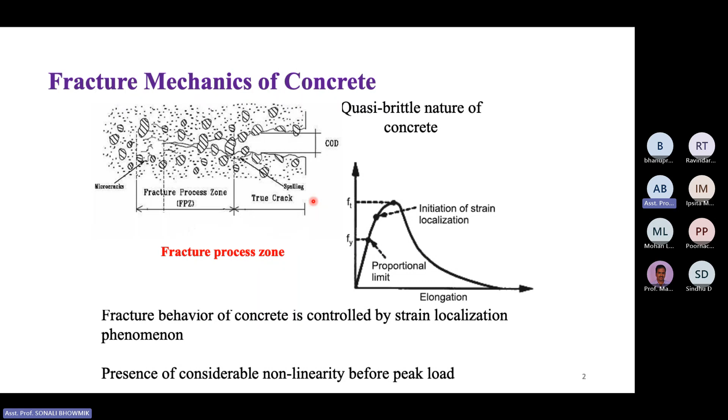Before peak load, these things are happening due to the non-linearity before the peak load. Now, what is exactly the non-linear fracture mechanics? It is nothing but these models.

In that image, you can see there is a crack initiation and an opening, wt, wc. This theory depicts how much stress is generating, what is the severity of stress ahead of the crack tip, which we actually call the stress intensity factor. These stress intensity factors define the severity of the crack ahead of the crack tip.

I'm not going deep into this analytical thing here, but the fracture energy I want to talk about is nothing but the energy required to propagate a crack, or you can say, to create a new surface.

This energy is something very important to compute or understand, to know the fracture behavior of a material like concrete. In this kind of model, the fracture energy is a very vital parameter through which we can understand the rate of crack propagation, the behavior of crack propagation, or the pattern of crack. Based on this, there are many models developed that I'll subsequently discuss.

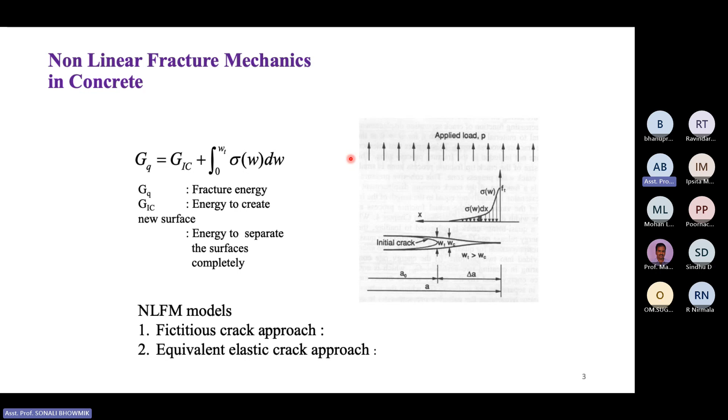...complicated when we are talking about fatigue of concrete. Fatigue means you have a structure which is subjected to a repetitive type of loading for a longer period of time. So what is happening in fatigue?

Suppose you have a structure with a service life of 50-60 years; this load is applied with a small amplitude, but applied over a longer period of time in repetitive cycles. Now in fatigue, to extend the service life, fatigue life assessment in terms of applied load cycles is important.

Why is it important? We want to know what will be the fatigue life, the life of a structure. In case of other materials, well-defined theories and models are there which can directly tell you the fatigue life of a structure.

But in concrete, which is much less explored, people are working a lot in this area to predict the fatigue life of a structure by considering all important aspects and phenomena: loading patterns, and parameters related to loads, frequency, and amplitude, along with other factors like environmental factors and concrete properties. This is important to learn and understand what the fatigue life of a structure will be.

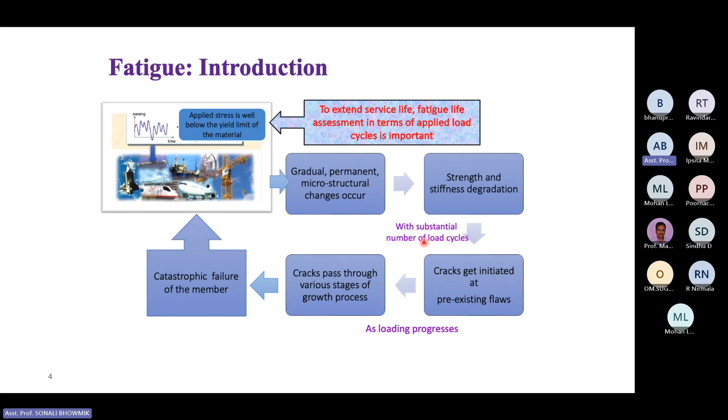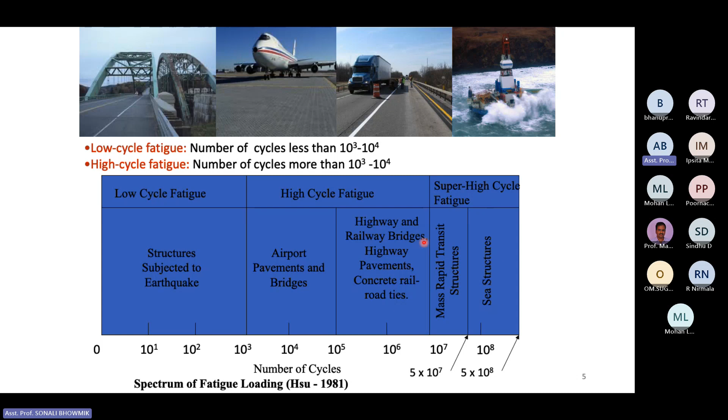So what exactly is fatigue loading? There are different types: low cycle fatigue and high cycle fatigue. Low cycle fatigue you can consider as structures subject to earthquake. With this timeline and these values, you can understand the number of cycles, the intensity, and the upper and lower bounds for high cycle, super high cycle, and low cycle fatigue loading. Basically we are dealing with most cases of high cycle fatigue loading, where the amplitude will be very low.

So how to handle those fatigue type of problems? As I mentioned, in the area of metallic structures like steel or other alloys, in the field of aerospace engineering, people are working in this area extensively, and the S-N curve is one approach through which one can find out the fatigue life, and this is well established.

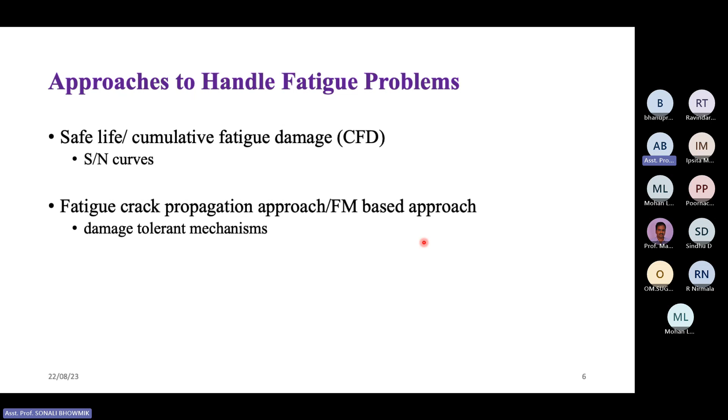But this S-N curve is not fully valid for structures like concrete. I'm not going deep into the S-N curves because here I'm specifically limited to concrete. So for concrete, there are other approaches, like the fatigue crack propagation approach, through which fracture mechanics based fatigue crack propagation approach one can predict the fatigue life.

So this S-N curve approach is not valid for concrete structures, because it does not fully include the concrete failure mechanism, and also does not differentiate between crack initiation and propagation phases. This is because concrete is a bit more complicated than alloy, due to the presence of a fracture process zone, as I have explained, which is non-linear in nature. So it cannot accurately address the problem. It involves extensive experimental data collection and does not involve fundamental material parameters that are valid here.

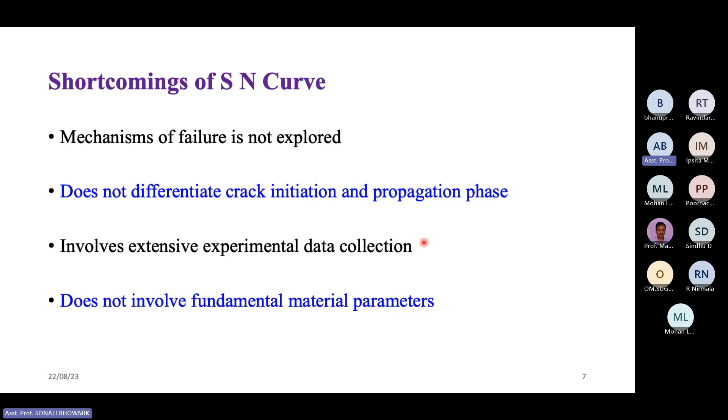So what does this fatigue crack propagation approach do? Here we assume that the structure has a pre-existing crack of some initial size. This approach is based on the assumption that there is a pre-existing flaw or crack of initial size, and crack propagation. When you assume this, you can find out the critical crack length and the number of cycles, all based on this assumption. And you can understand that failure is prevented even without giving excessive safety margins.

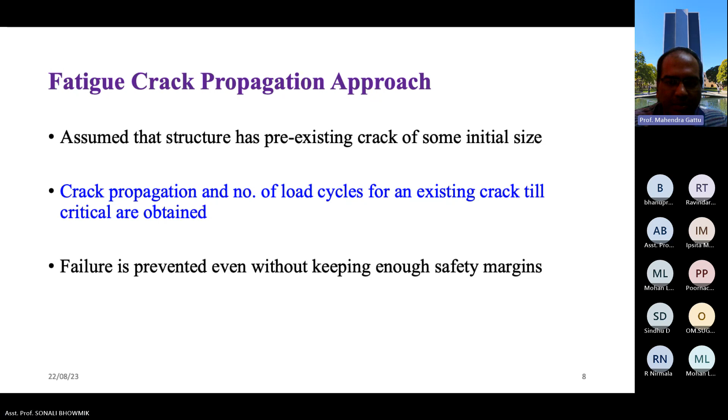Is the PPT visible on this side? Right side, sir, it is visible. We are just seeing the slide on fatigue crack propagation approach. For me, the right side is not visible, I don't know why, it's in the left location. You can press the escape button and then I can start. No, it's not an issue for me, I can carry on for others, just to make sure.

Actually, we lost the slides now. I mean the last slide, we lost it. I'm not able to see the slides, I don't know about other people. Can you see the slide? Sir, I'm also not able to see the slide. I couldn't see it either, probably. Let me reshare the presentation. Again, I'm sharing the presentation, I don't know what... it got hung.

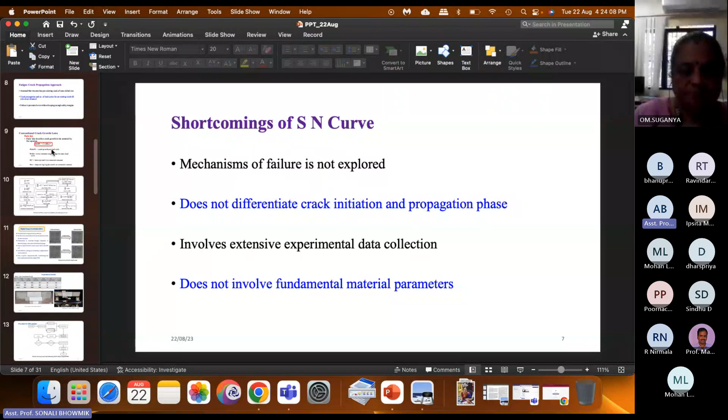Is it fine now, sir? Yeah, okay, okay.

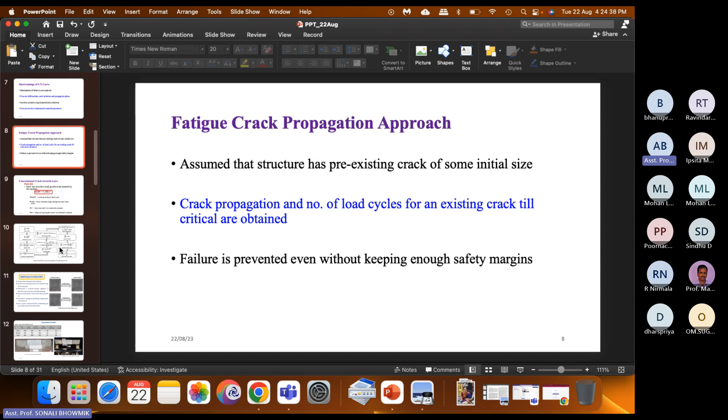So, on that note, to predict the fatigue crack growth of concrete, there are many analytical models developed till now, based on some pre-existing empirical formulae, and also many models that predict the fatigue crack propagation of concrete. Here I am just giving some overview.

Now here, what is the issue? There is a lot of research going on in this area. Why is this specific equation not valid for concrete? Because concrete deals with many more parameters, and finally researchers have come out with many parameters.

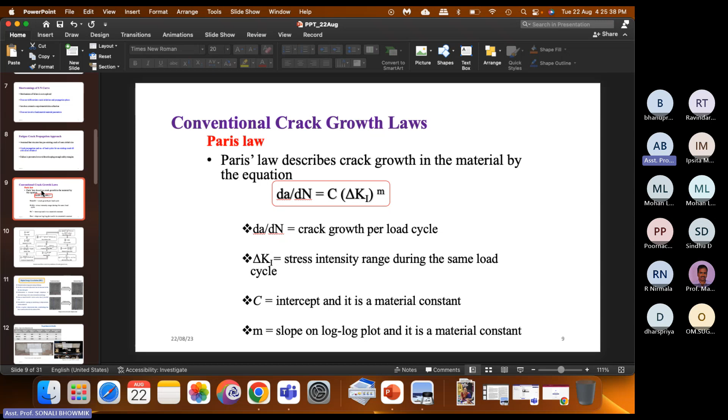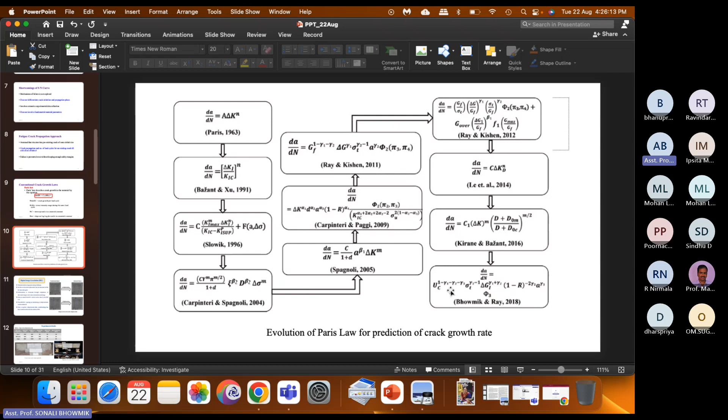Like in this PPT, you can see the evolution of Paris law prediction for crack growth rate in concrete. It started in 1963, and the latest one, derived in 2018, is a crack growth rate law derived for plain concrete. If you see, the last expression deals with many more parameters, like critical energy release rate, crack length, and other parameters like stress ratio.

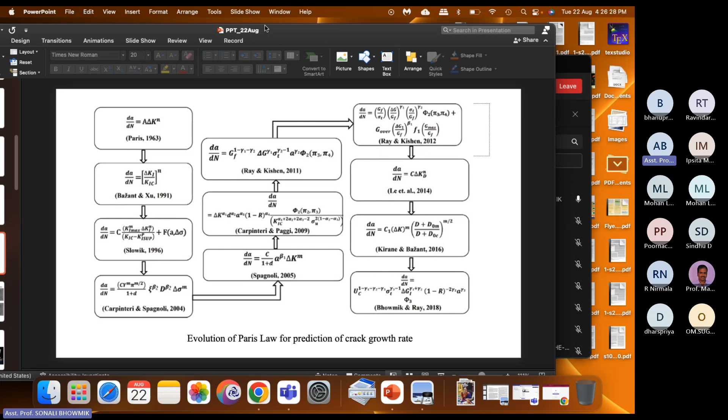You have other parameters like energy release rate, sigma t meaning tensile strength, and many more things. So these are some developments in this area, where there was an attempt to develop a fatigue crack propagation model which can accurately predict the fatigue crack growth rate, and finally the fatigue life of a structure.

So, in understanding these models, it has been understood that every model was refined and improved eventually, and finally arrived at a model which is much more improved and robust, giving a very good prediction of fatigue crack growth rate. So this is the latest model.

This analytical part is up to this much, where people have already done work. In this model, it has already been proved, and in this paper things are already explained in more detail, but here I'm just mentioning a few things: in the analytical area, predicting the fatigue crack propagation model depends on multiple parameters, and it is very important to verify and validate those parameters, and to understand whether each parameter has a direct or indirect effect on the fatigue crack propagation model.

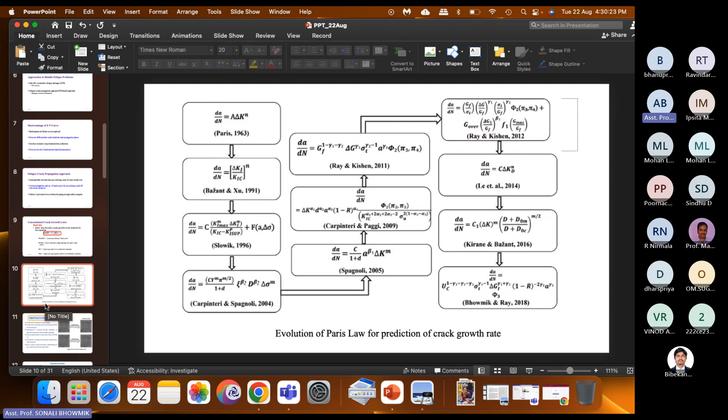But here, where I'm working in the area of advanced crack detection techniques, which is non-contact techniques, DIC and acoustic emission. Here I'm explaining a few things of DIC, where this is nothing but non-destructive.

This is an image processing technique where we compare images, we click images during the experimentation, and we compare both the images, meaning deformed image with undeformed image. By doing this, there are already softwares available, and also some open source algorithms available. Those algorithms one can use, refine, modify, and improve to find out the surface strain and surface displacement of materials.

So this is a very long process of digital image correlation technique, where it is not only dealing with the algorithm, we have to prepare the sample, and as I mentioned, in that approach what we do is we are always considering a pre-existing flaw or crack size, which we call in experiments the notch size.

For notch, those notched beams, by preparing those samples and clicking images at particular intervals of loads and time, we are getting those images, and the next step is rigorous analysis of all those images.

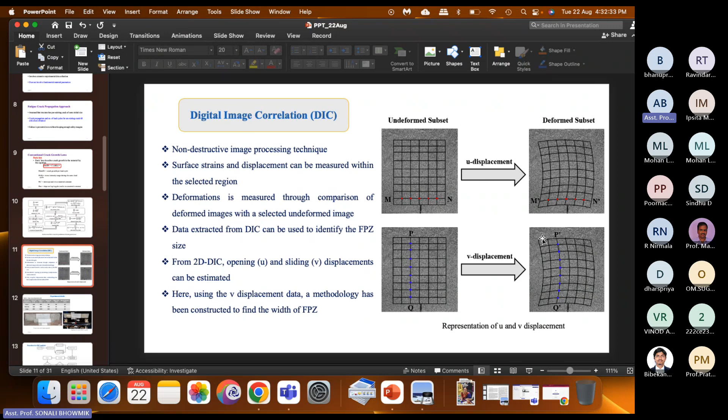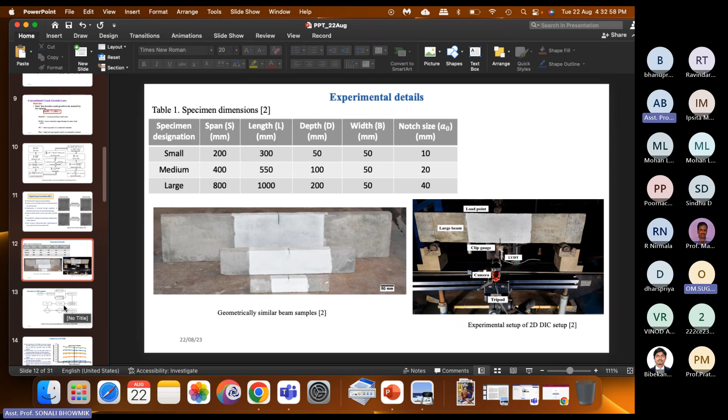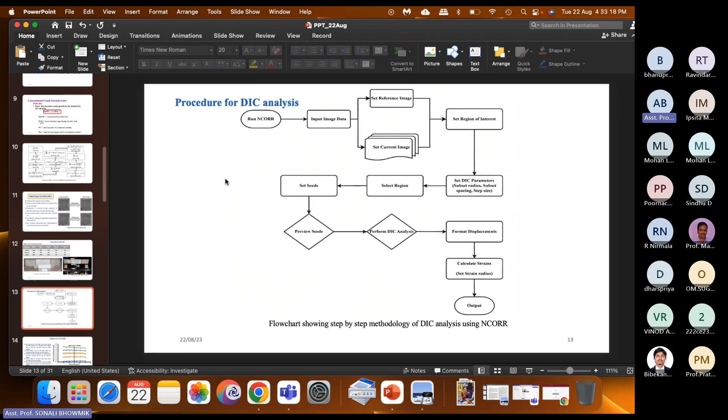This is the DIC procedure using the NCORR algorithm. This algorithm was already developed for other materials also. Now for concrete, by calibrating this algorithm, we can use it for plain concrete. Till now, this algorithm has been modified for plain concrete. We have planned to develop it for other purposes also.

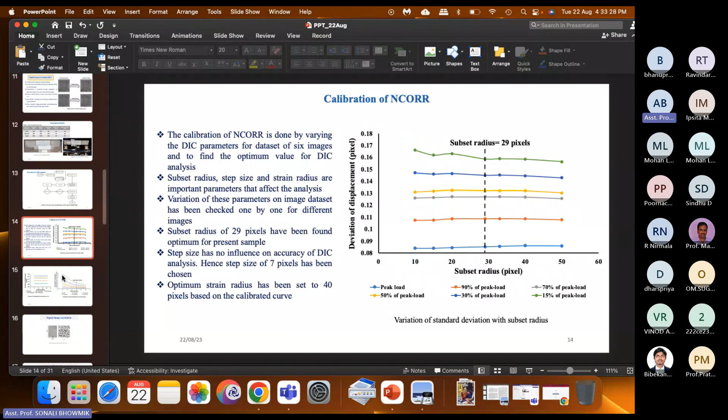Here are the calibration procedures of this algorithm, where those subsets and these are input parameters, because definitely we are dealing with concrete. We never know what is the accuracy of those results, since these are surface displacements, so we can't blindly rely on whatever the algorithm gives us. In that case, the input data has been verified repeatedly with different input parameters, and we found very good results with some optimum values.

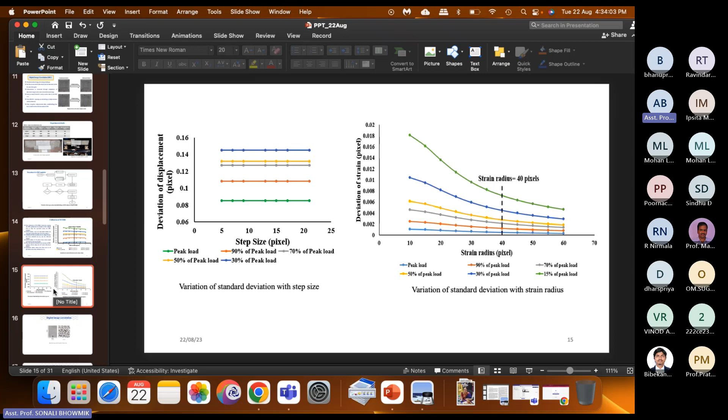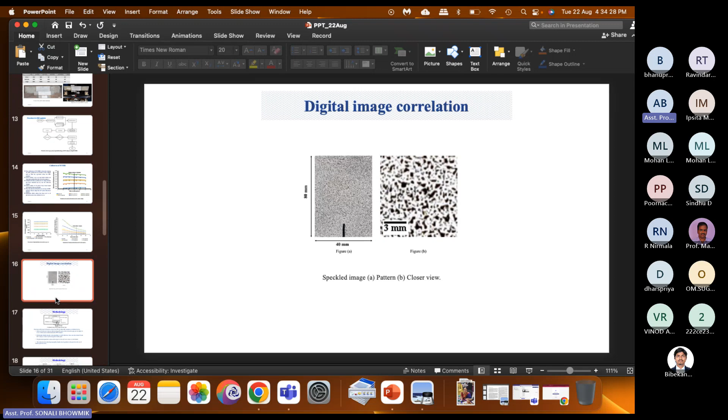Now, what is the use? Why is this data used? One is surface displacement and strain, we can get it, and for other purposes also we can use it. But in fracture analysis, we don't only want surface strain and displacement, we want to know the fracture patterns, the crack growth pattern.

So in that case, using those data, two methodologies have already been developed. One methodology is to find out the fracture process zone size in terms of length. Another methodology is to find out the fracture process zone size in terms of width. Both dimensions are very important for the fracture process zone, because as I mentioned, this fracture process zone is crucial and totally related to the fracture behavior of concrete.

This nonlinear zone, if someone predicts what is the area, meaning within the concrete what is the size of this fracture process zone, then one can understand how much energy the structure can absorb or dissipate accordingly based on the problem. So here a method has already been developed to find out the fracture process zone.

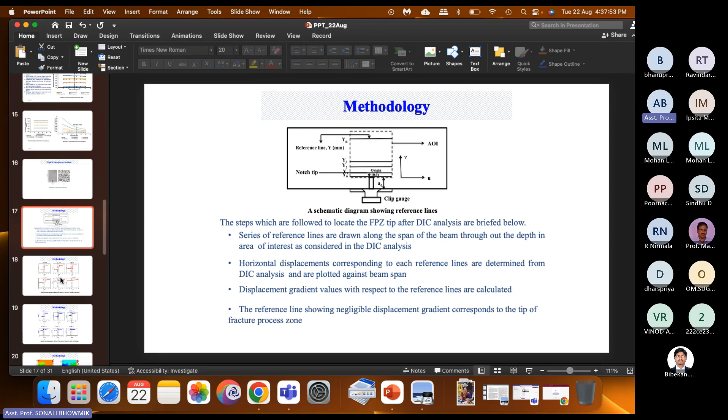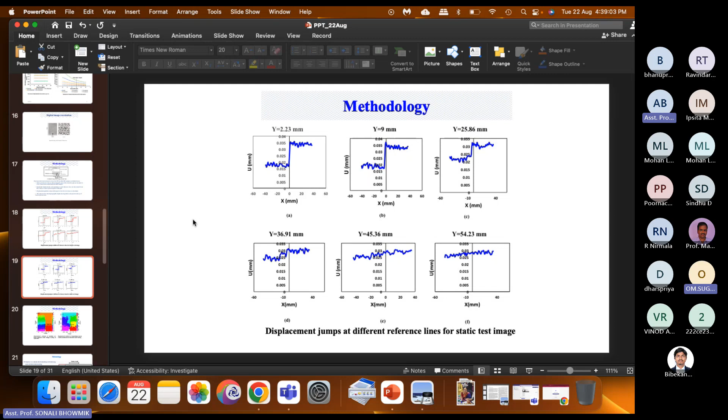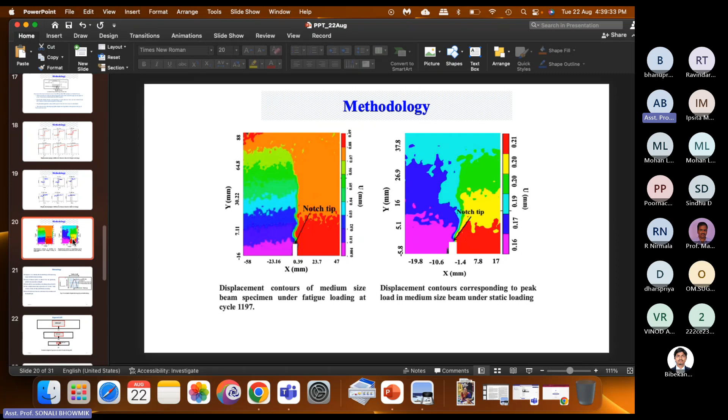Now this is about the fracture process zone length, and this work can be carried to fracture process zone width, where methodologies have also been developed and verified by the fracture process zone length, showing it is working fine. So why is it important to find the fracture process zone width?

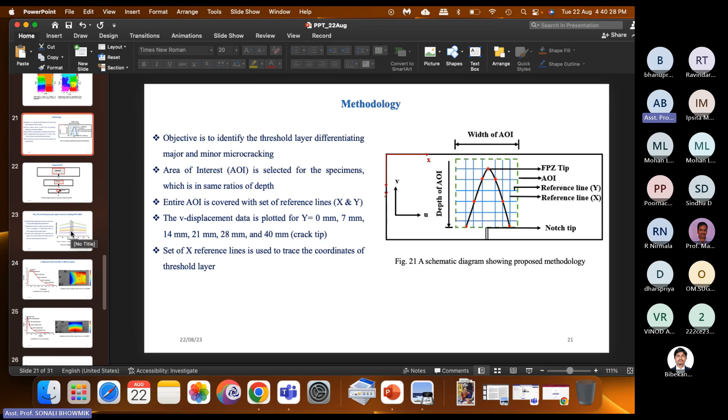Because it gives us an accurate estimation of fracture process zone size. Previously it was understood that there is no significance in finding the fracture process zone width, but eventually many other researchers found out that it has significant size and is very important to find. So in this scenario, a set of data was again analyzed, and these are some plots for DIC analysis.

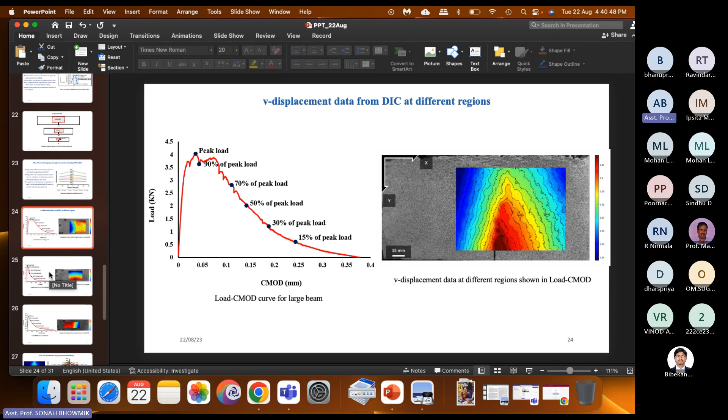If you can see here, this is displacement data extracted in the V direction. As I mentioned, deformation in the V direction is vertical. That's how it has been calculated, and finally we arrived at the conclusion that the size of the fracture process zone can be computed with the help of DIC analysis, and non-contact techniques like DIC and acoustic emission.

This acoustic emission area is also where I found the fracture process zone size and fracture patterns, which I have not included here, but it is an area that can be fully verified with both non-contact techniques. From this validation, it has been detected that the contour this algorithm gives us clearly matches the fracture process zone tip, found using the methodology developed to identify the fracture process zone tip.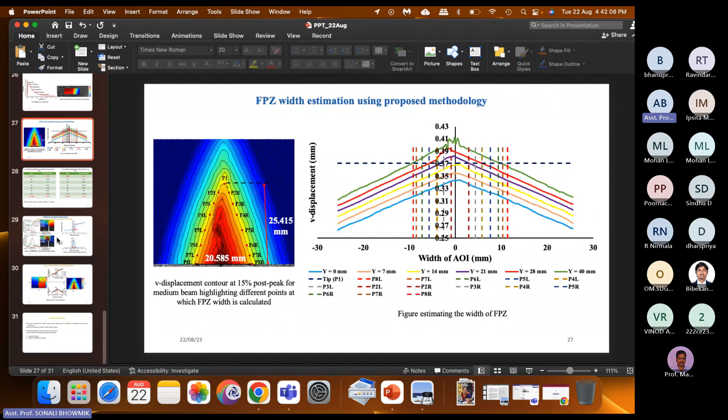From this tip, the width can be directly found out. This width has already been found, and these are the values here—this is the height and this is the width, 20.585. This is my student's work, so we are working in this area.

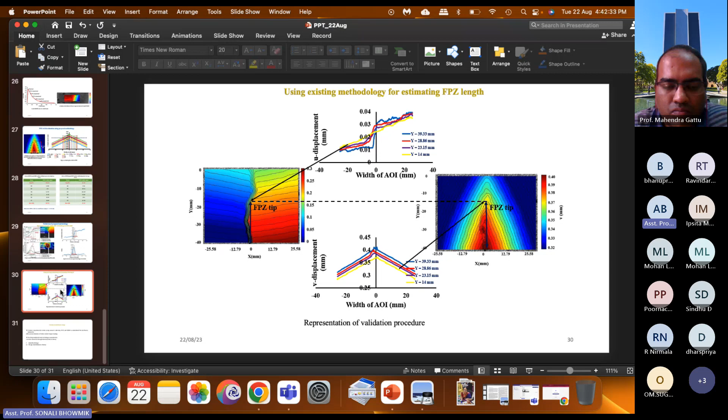So after this much, I just want to conclude here. There are many more interesting areas where, using non-contact techniques, other patterns of DIC, patterns of crack propagation, behavior of crack, and the crack path—all those things can be found out.

So in conclusion, I already mentioned in every slide what are the concluding remarks here. I just want to conclude that the significance of this area has already been explained, and the necessity of doing this work is because concrete is complex, it has complex behavior, and under the action of repetitive loading, it becomes more complex.

So in that case, this approach gives us more accurate prediction of the life of concrete structures. In future, experimental studies using acoustic emission, DIC, SEM can be used to understand the failure mechanism of concrete under fatigue loading. Finally, analytical tools can be developed for damage assessment in concrete structures. Different theories like thermodynamics theory, peridynamics theory can quantify the damage and help design rehabilitation schemes. So I'm completing my talk here.